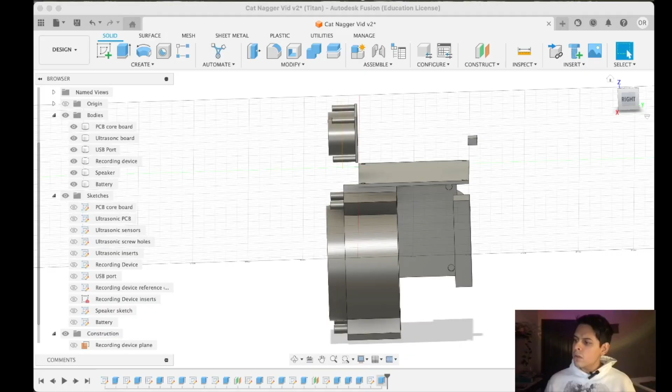So it is time to start our case. All what we did was to get the relevant references of my circuit and all its components to be able to create the case. So let's start the case.

Let's create a new construct. Let's create a plane right here. Let's give it 4 millimeters. It's fine, 4 millimeters is fine. So now we will create a sketch on this new construct.

We'll call it case top plane. So here we need to create a rectangle.

So the device should have walls. My idea is that the device should be assembled into the case in two pieces, two walls together, like this. So this is gonna be one half of the case, and this is gonna be the other half, and it's gonna be assembled like this. Why? Because this is gonna allow us to play better around with the components. That's my theory, hopefully it works. Because if not, it's gonna be difficult to assemble the device.

And you know what, that makes me think. The thing that I just told you makes me think that the battery shouldn't be there. Because if I want the battery to be connected, I think it would be more convenient to have the battery in the bottom, so we have two parts, only two.

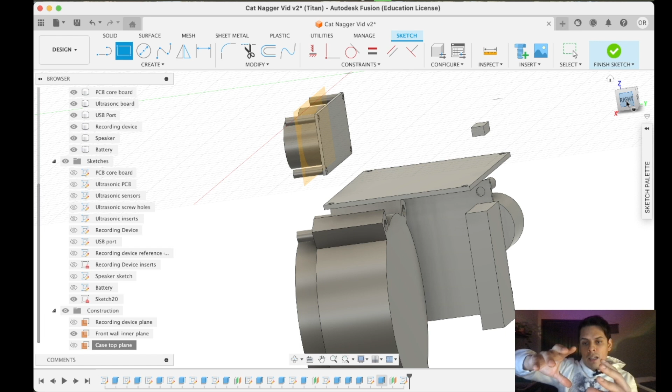So whenever you unassemble, you can just take, for example, the half that doesn't have any component on it. Because if you try to separate them, whenever you have the battery in a parallel wall, whenever you unassemble the device, you might pull the cable that connects to the battery. So I think it's gonna be better if we move the battery to the bottom.

What do you think? Let's move the battery to the bottom so we can actually see. I think it's gonna fit.

So what we can do with this sketch, so this is the top. Let's rename this sketch so we don't forget: top sketch.

Case top sketch. Okay, so let's go and copy the battery sketch. Actually, what we can do is just click copy, finish sketch. We can go back, go to the bottom, and create

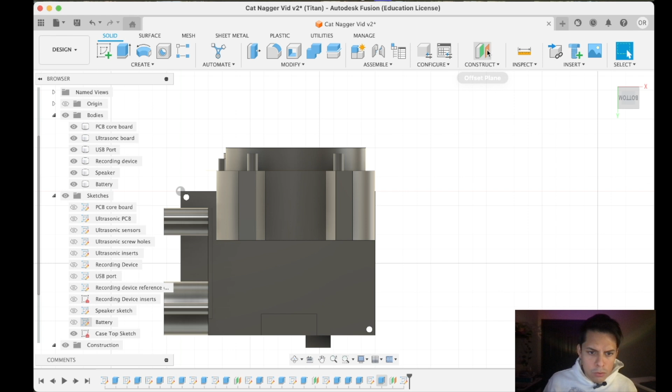a plane right here, so we can create another construct that will be a construct where we will use this. We need a plane, and what's going to be the distance? So we can go here and kind of move it and see, maybe 4, maybe 3 millimeters.

But it's going to be 7.4 millimeters, right, for the battery. Let's try to do the 23 millimeters. I think that's okay for that plane.

So we have plane 4, and on plane 4 we're going to create another sketch. Let's try, created the sketch.

So we are going to delete that, and we're going to paste this one. We're going to move it. Even it might actually fit under. Oh, we can rotate. Let's rotate it, and let's see where it fits.

Actually it fits perfectly here. Yeah, it fits perfectly here. So it's not going to collide with the speaker.

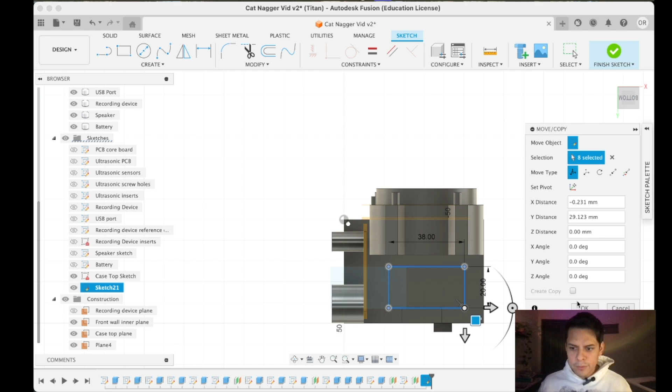Actually, we can extrude and go up. Yeah, it's perfect. Now we just need to extrude again, the battery. Finish sketch. Now we're gonna do minus 7.4 millimeters.

There you go. Now we can delete our previous battery. Let's delete this one. Now let's rename this one battery.

Now this plane is renamed battery plane, and this is gonna be also the case bottom plane. That's gonna be cool. Okay, we will be able to reuse this plane whenever we create.

Actually, we can start from the bottom, from this actual plane. Why? Because this side of this new volume that we're going to create is going to hold all the components, and the other one is just going to be the cover. So let's do it into two parts.

Okay, so now we will create another sketch on this plane. Yeah, there you go. Let's test that we're in the right plane. Sometimes one can get very confused. Okay, yeah.

We can revert that and start creating our case. So let's see how we're gonna do it. So from this, what is this? From here,

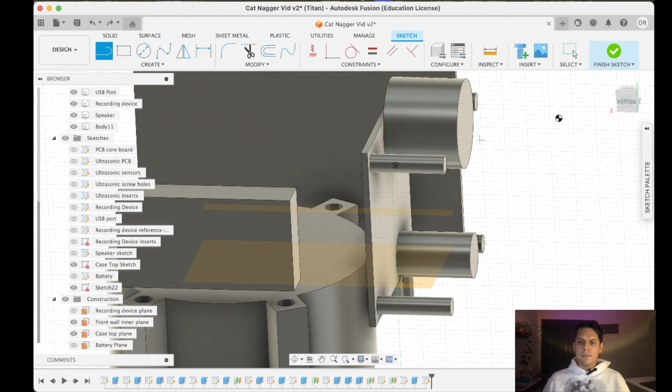so these are the references that need to be cut through. These shouldn't be at the same level. Why? Yeah, so these shouldn't be at the same level. Okay, I'm gonna let you know why later, but let's go and check this volume. This volume is part of the recording device.

This volume is part of the recording device.

So let's repeat this. Finish the sketch here. Let's edit this feature. This is 16 millimeters. Now let's do it 20 millimeters.

But you will see why, because I wanted to go through the wall, and actually the inserts should have a little more wall, a little more thickness behind, because you don't want the insert to just go all the way through. You want some wall behind, behind the insert, at the end of the insert. You will see why. So now I think we are okay.

So now we're gonna create it. We're gonna go back to my sketch here. I think it was this. So we're gonna rename it as

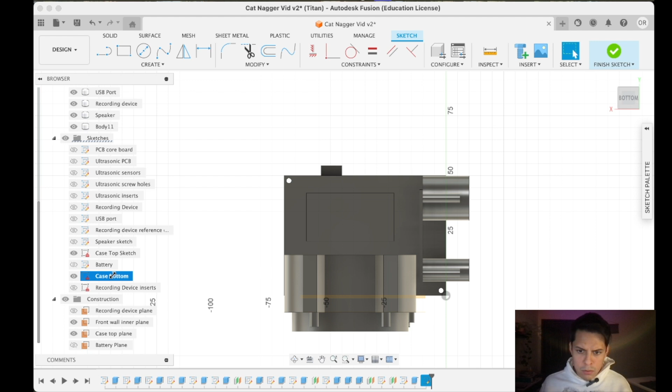Case bottom. So now we're gonna create a line. We're gonna transfer this line. So from here, I want maybe 2 more millimeters of wall.

Yeah, I think the best thickness for a wall should be 4 millimeters, maybe. For the device, maybe 3 millimeters. 3 millimeters is fine for a wall, I think. Now let's do it 4. Why not 4? Let's not be cheap with the plastic.

Okay, so what we're gonna do is, now we have the measurement from here. So now this one is gonna have 2 millimeters towards here. This one is gonna have 2 millimeters towards here. 2 millimeters. Okay, so what does this mean?

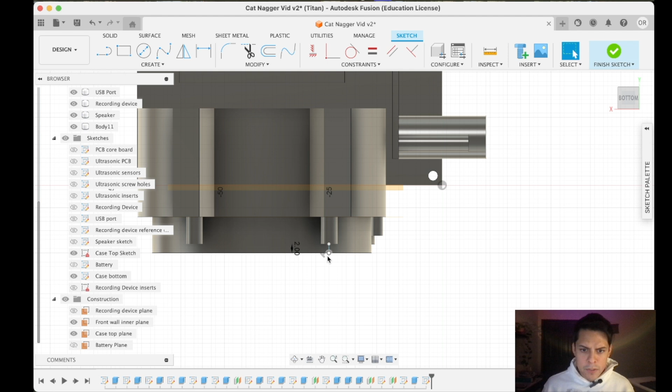This is gonna give me the reference of the outer wall for my device. So my outer wall should be here. The outer wall. Yes. So now from here,

I think it should be okay. Somewhere here. Right here. Oh no, let's repeat that. So I want this USB port to be a little outside. There you go. Yeah.

Okay, if we look at this, this will be the base. I think let's do this one here as well. Let's add to the speaker hole.

Why do I need the references for the holes to go so far? Because whenever I create the volume, there's an operation that is gonna respect those references, and it will go around those references instead of creating the volume.

So I will cut those spaces out of my actual volume, so I don't need to copy those references again and do the extrusion of the solid again. So I don't need to cut the solid. It's gonna do it for me automatically. That's the idea. That's why I'm so interested in the references going through the walls.

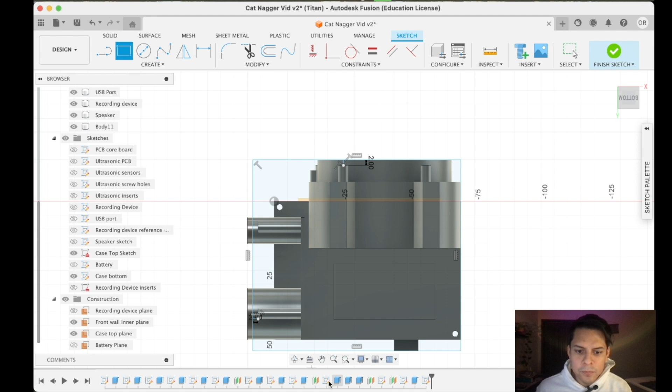Okay, so this is one. Okay, let's finish this sketch. Let's edit this one. Let's do 10. There you go. Now I have these.

Now I need the inner walls. So from this sketch, what I'm gonna do is also create the holders for the battery. So I'm gonna copy the references of that battery so I can create the battery holder.

So I want to try something. Let's see if I can. Let's see if it works. So from here, to the half. Let's see if my idea works.

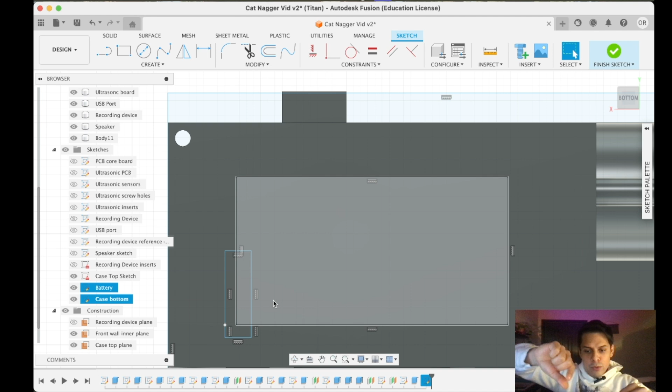I always wanted to have something like where you just introduce the battery and you snap it. So let's make something like this. Wait a second.

But let's give it some tolerance. Yeah, you don't want everything so close, so we are gonna give it some tolerance.

Then we will go here. This one. No, sorry, it's a little twisted. Then go to 0. There you go. So now we can delete this.

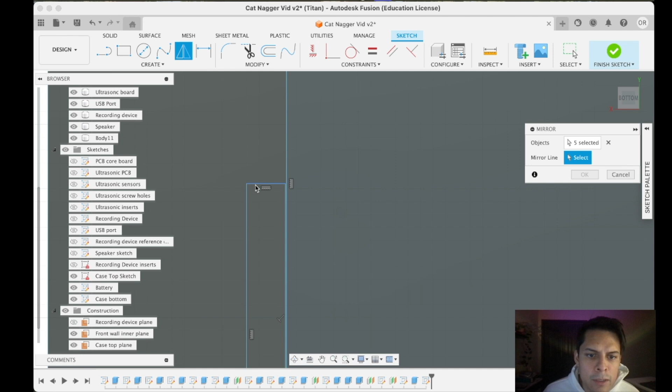We can delete this line. We can also delete this line. Now we can mirror these 1, 2, 3, 4, 5 lines. We can use mirror, select this one. We can trim this line, and there you go.

We have one piece of the holder, and then we are gonna have another holder here. No, let's do this. No, wait a second. No, what we can do is something like this here.

Now, from this one, we have something here, to here. Okay, like images. There you go. Yeah, actually, I want to move this line a little further. There you go. Okay, so now we can finish this sketch and we can extrude this.

So I'm going to extrude this thing. Extrude it somewhere here.

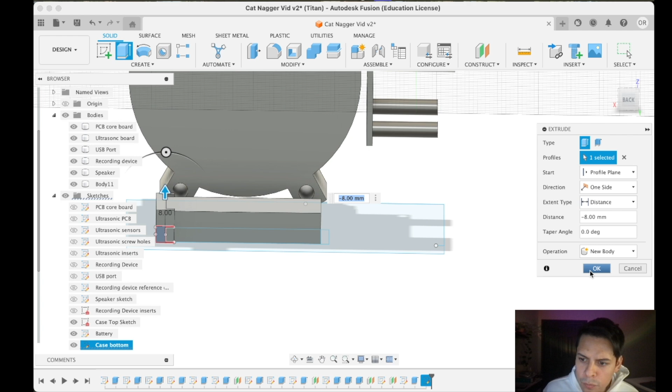Okay, now let's... so in this case, for example, I don't want to see this, and I want to see this, and this, and this. So I can focus only on this one.

So what I want to do now is create a small sketch here on this wall. And I want to see the battery as well. Battery, and these are the battery case bottom.

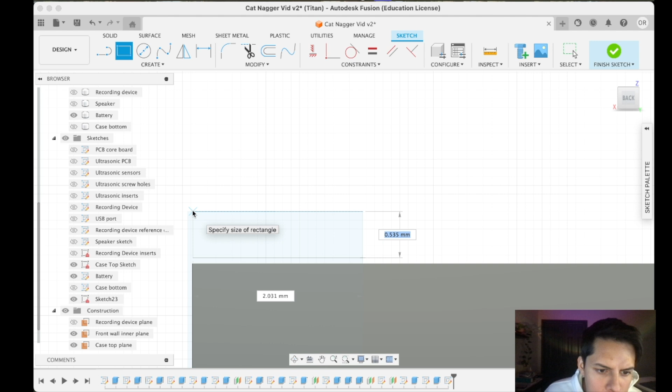So now here I'm working on this one. Also, I want to see battery, and maybe I want to see this. Well, I want to see actually the battery. Yeah, so what I want to get is somewhere here, because now I want to extrude this.

There you go. Now I want to see this, and then I want to extrude this. So this is going to be my battery holder. So hopefully with this, the battery doesn't move. I know the risk here—my experience tells me the 3D printer is not going to shift this. That's what I think.

Let's see, because I think this didn't work as I expected. So cancel, I need to modify my sketch actually.

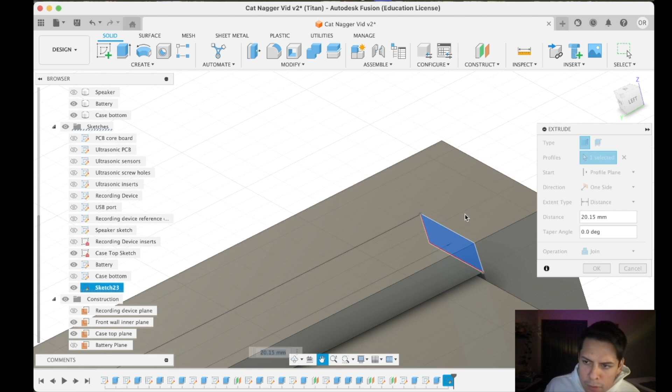Now we extrude here. Join. So I think I still need to change this. Join. There you go, there you go.

There's my battery holder. Now I need to see the case bottom, because I'm going to extrude this back part too, but I need to see the case bottom. So I'm going to extrude. I'm not being very exact with this because I don't think I need to. There you go.

Now here we're going to do something very fun. So here we're going to do it a little more like this. And in order to print this easier, we're going to do something a little crazy. We're going to create a sketch on this side, and create a triangle like this. A little triangle like this.

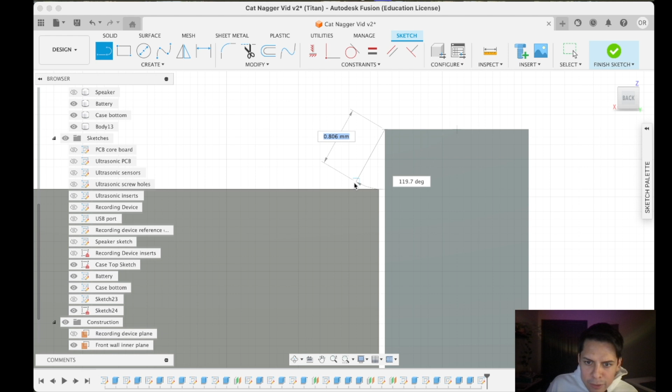So this should keep the battery in place. Also, what we are going to do is extrude this and leave the corners to object. There you go. Join.

Also, I'm going to change this sketch a little bit because I want to leave the corners without covering. Because if you look at the battery, one corner has the cable. So I want the flexibility to flip the battery as needed.

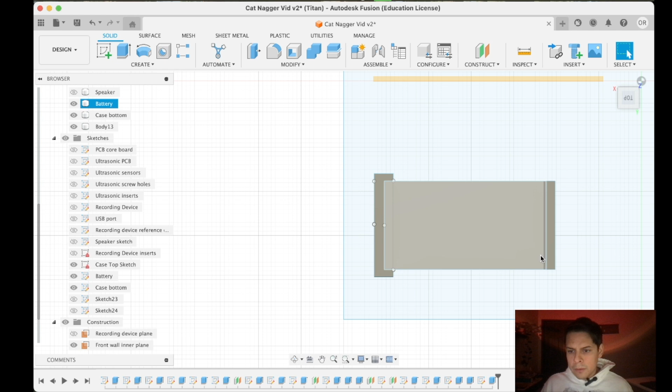So we can... I want to move it. I want to delete this constraint. Now I can do it. There you go, we don't need to be very precise for that. And I think we got this. Let's see. Okay, yeah.

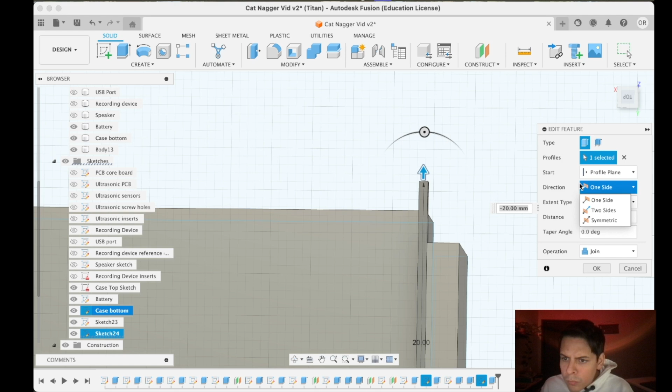Now, the only thing we need to do is repeat this volume edit feature. There you go, to object. So we select this face and it's going to extrude up to this face and join.

And now we have our battery holder. Also, we're going to do something to be able to print this correctly. We're going to modify this sketch. Let's see how we can modify this sketch.

Well, this sketch we're going to rename as battery bottom tip. And this we're going to rename as battery top holder ceiling. Okay, now we're going to change this sketch.

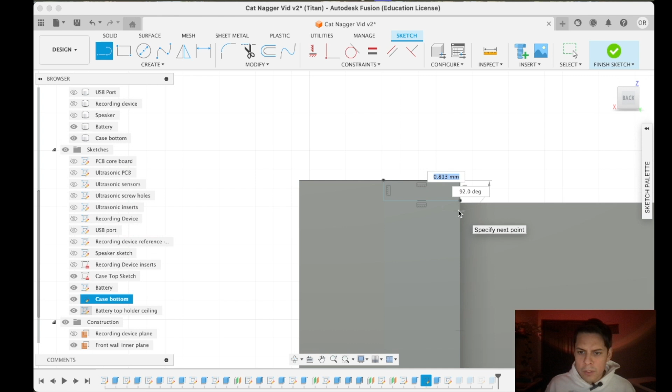So what I want for this sketch is to also have this kind of thing. So I want to have... no, this is not bad. Okay, this is too small. So we will need to repeat this. Finish sketch. We will need to repeat the extrusion of this feature. Let's do 10.

Yeah, I think this is gonna be better. We do this, let's say 9 millimeters. It's okay. Now we're gonna call this volume battery holder bottom.

This we are gonna combine these ones. With this, we can combine two components. Well, we will be able to do that until we create a case, but it's fine.

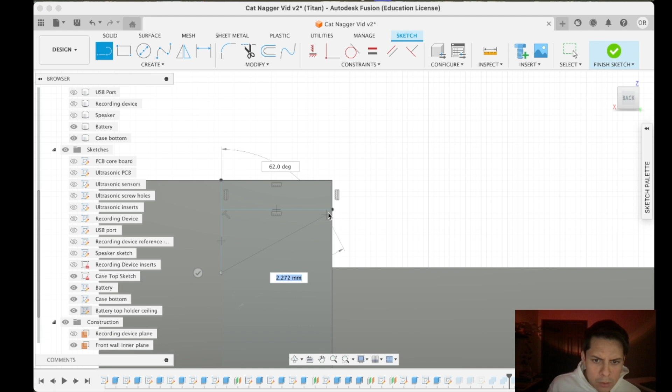Now we are gonna modify this sketch. This sketch we are gonna change it to something like this. So why? You will see.

Now there's an angle where it's gonna be easier for the printer, easier for the printer to print this ceiling. Without this, the printer would try to print on nothing, and it's gonna be messy. So it's better—most of the time it's better to keep angles on the overhangs.

So over here. Oh, there you go. We didn't lose it. Okay, so I think this was one of the most complicated parts, the battery holder, but we got it. Now, we can extrude the walls.

Now it's the moment to extrude the walls. Let's see if what I was thinking works for the references.

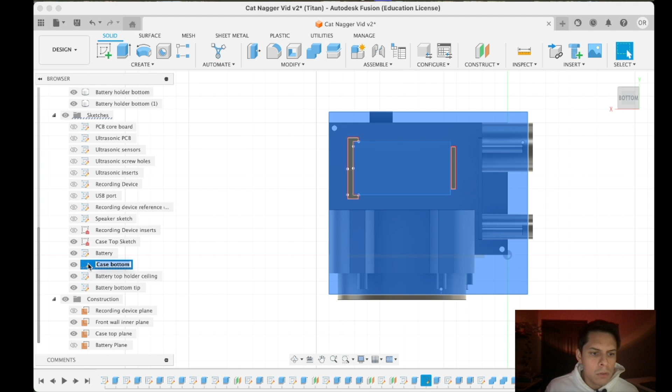This is gonna be these walls. We are gonna modify this. This is the case, we'll modify this sketch, and we are gonna use the offset. We said that we want 3 millimeter walls.

No, let's do more. 5 millimeter walls, like that more. I like that way more. Okay. Oh, that's 4 millimeters, I like that.

Okay, now we're gonna extrude the walls. Oh well, but this is gonna be only 2 walls. Yeah, this is gonna be only 2 walls. Why?

Because sketch. Because we only want 2 walls. But actually, yeah, this is fine. Okay, yeah, and up to here.

Yeah, these are gonna be our walls, and we're gonna eliminate this line, this line, this line, and this line. I think so, yeah, that should be done.

Sorry, we shouldn't eliminate a couple of walls. Sorry, there you go, we should keep. We should eliminate this one, and we should eliminate this one, this one.

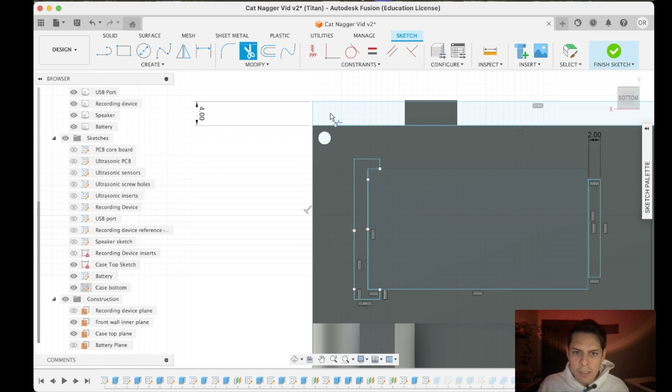Where does this line get up to? Oh, here's the line, yeah. Okay, so up to this here. Okay, yeah, I didn't have that line, so we can eliminate these, and we can stay with this.

So as I told you, we are gonna create 2 walls on each part of the case. The case is gonna have 2 parts, like a bottom part and a top part. So we are working on the bottom part, and the bottom part is gonna have 2 walls.

Now we are gonna try to create a solid. And there you go. No. New body. Okay, didn't work.

Actually, we're gonna need to cut it, but don't worry, I think I have an idea to do this. Don't worry. So I think that's gonna be okay.

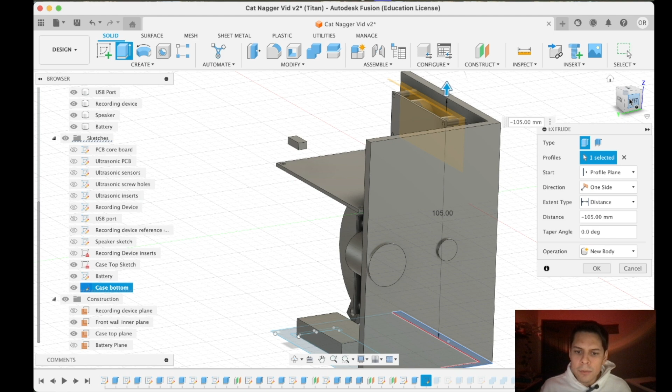Okay, yeah, let's say 105 millimeters. Yeah, that's fine. Okay, now we are gonna do the bottom.

Sketch, we're gonna remove this line. Now we are gonna create a solid towards, what you're gonna include it, you're gonna include it, you're gonna include it. And then now this one is gonna be 5 millimeters.

Oh, 8 millimeters, we don't need something so thick. Yeah. I think this is fine. Okay. Okay. Yeah, this side, okay.

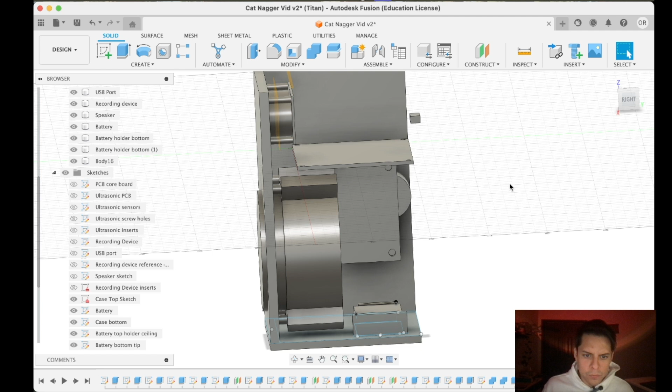So, for example, we're gonna cut. We can take this one, and to cut through these walls, we can edit feature and do a cut. Objects to cut.

Cancel? No. I'm pretty sure I can. Yeah, I can move this one here. Yeah, I can move it through the history. Edit feature and cut. There you go, and voila.

Now we just cut through our body. No, that was very nice. But let's keep moving with the inserts of our ultrasonic thing.

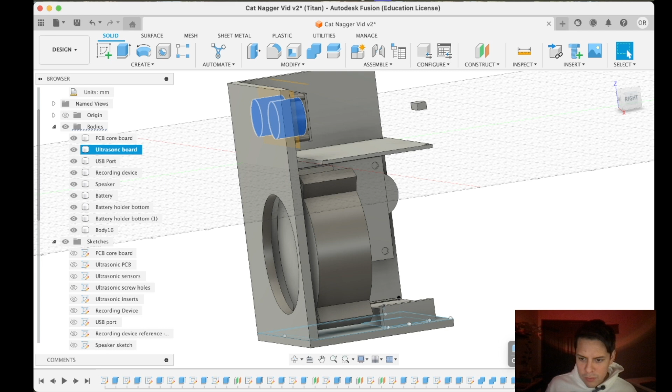Okay, we can do the same. Actually, we can edit this feature. We are gonna do it like this. We're gonna just increase the distance and cut through.

It says there, there's no object to cut. We select it, and there you go. Now we just cut through our wall. We can repeat this process with this.

Okay, if you look at this, when you select the volume, it indicates here with these 3 lines which one you have selected. So let's move towards the end. We can edit feature and we can select cut, objects to cut body, and there you go.

Now, as you can see, there's a space. There is still a space here. The thing is that we need to actually cut through the walls to have those.

So let's do it. We need also those ones to be almost here. Cancel. Let's move them almost to the end. Cancel, move it to the end. And these ones, this volume to the end.

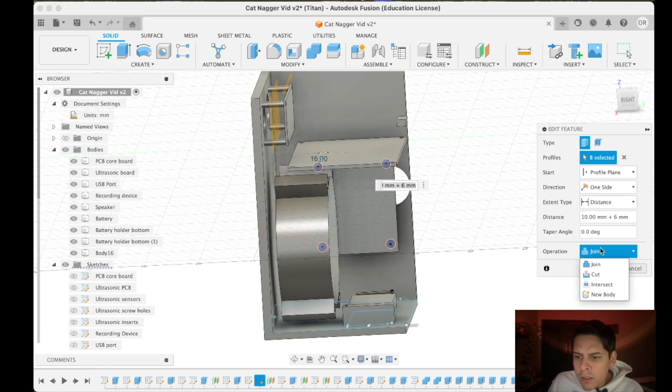Now, actually, let's join them now, because now we can join them. Let's join them, let's join all those geometries. Actually, it didn't join them.

So we select the target body, and then we select this one. I think this happened wrongly. Where's the battery? The battery. This.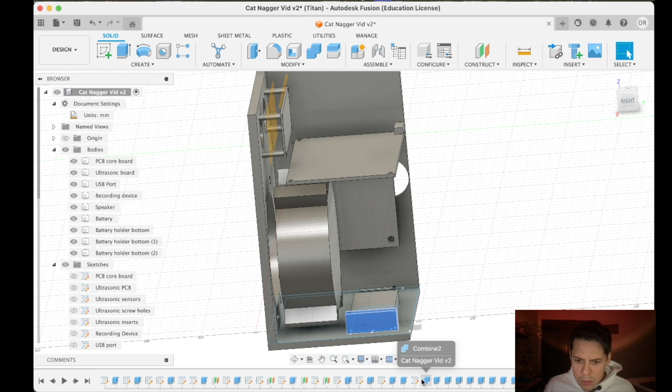So let's delete this one. Let's delete this one. Now the battery - how can we split the battery from the bottom?

So let's change that extrusion. Yeah, this extrusion edit feature, instead of join, new body. There you go. Now it is a new body. So you have the body 19. Still, oh yeah, there you go. So now use this one, this one, this one.

So now we're gonna join everything to this. Now this one, and this one. Now they are all joined in body 19. We're gonna rename it like case bottom. And there you go. Now we have almost everything except for this one. I'm gonna do this one and cut. Good, there you go.

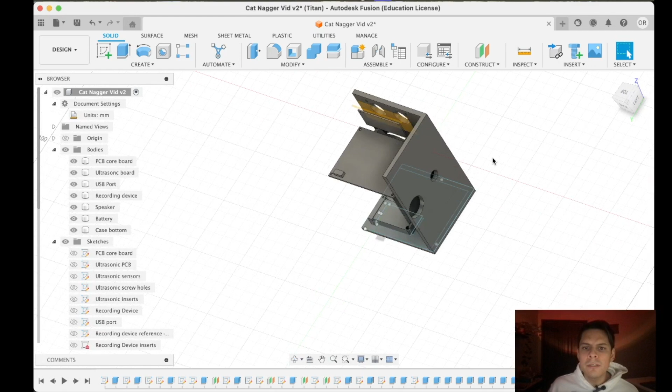Now I think we have everything that we need. No, there's something I don't like. I need these ones to go a little more, because if you look at this, there's too few. But what I was thinking, we will need to take a cylinder out.

This is gonna be very complicated because if I print like this, it's gonna be complicated because since it is a very small amount of material that needs to go out to cover the insert, it's gonna be complicated to print that because of the overhang.

So what we can do is extrude the material and try to fill it around and see if that can help, or maybe just do like what we did with the triangle previously. What we're gonna do is try to accommodate some material to hold the insert better.

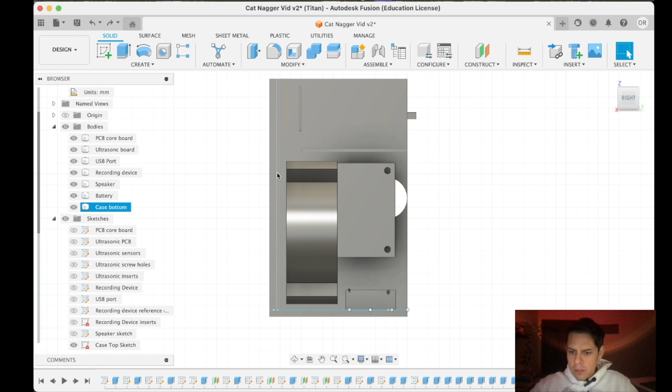To achieve that, we will need to do something very tricky, very sketchy. And it's going to pull up. Actually, when you see some cases for devices, the inserts, or where the screw goes, are pulled a little off from the inner face of the case to accommodate the screw. So we're gonna do the same.

But since it's gonna be complicated because of how the printer works - I'm gonna try to print it vertical like this - so yeah, it's gonna be a little tricky. I don't want to use too much support, and even with support it might make it complicated. So let's try to make these the holders for the insert.

So what we're gonna do is create a new sketch here on this face, and this is gonna be very, very simple. So we're gonna remove this. Maybe the recording device - no, actually, let's remove the speaker, the ultrasonic board, and let's leave this one.

So what we're gonna do is a square, but let's see how we can do a rectangle, a center rectangle. So we're gonna use a center rectangle for this. I think this circle is 2.8 millimeters, so it's gonna fit in a 2.8 by 2.8.

So the square should be something around, let's say, 4 millimeters maybe - let's play around with it. I think this is fine, 4 millimeters. So let's repeat that process - double enter 4 millimeters, 4 millimeters, 4 millimeters. For this, I guess it's gonna be bigger.

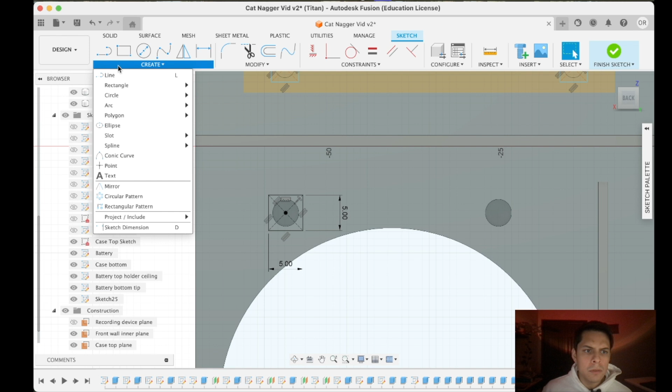Maybe 5 by 5. I like it, 5 by 5. Rectangle, 5 by 5. Rectangle, center rectangle, 5 by 5. Let's do the next one, 5 by 5. Okay, so we have it - like it. Now we'll create a solid from this.

But now I want to show the speaker. So let's - I want to show this. No, this - don't show any plane. Don't show anything. Let's not show the speaker yet. We will use the speaker, but in a moment. Oh yeah, there you go. Which is this? Which is this? Which is this?

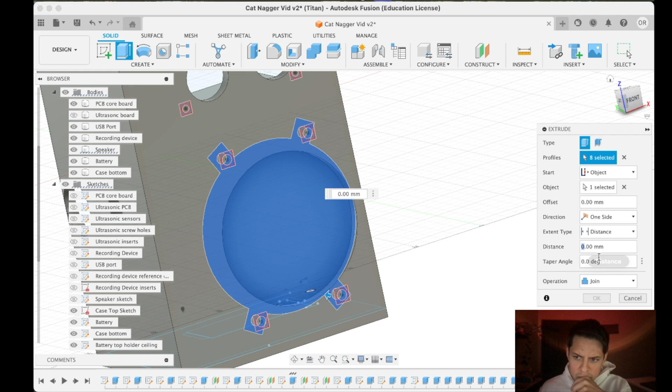Now we're gonna show the speaker, because what we're gonna do is extend to object. And what's gonna be the object? The speaker. So extend to this object - maybe join, yeah, it's gonna join. Object, direction, one side, selected. Extent type to object, start profile plane. Yeah, and I need to select the object. Let's confirm. Yes, I think that's exactly what I wanted.

Okay, I think that's exactly what I needed. But now the complicated part comes to play: how to do it without a critical overhang.

To avoid a critical overhang, I think we need to create a new sketch. Let's see what sketch these are, then edit. This is going to be the insert holders, the front wall insert holders.

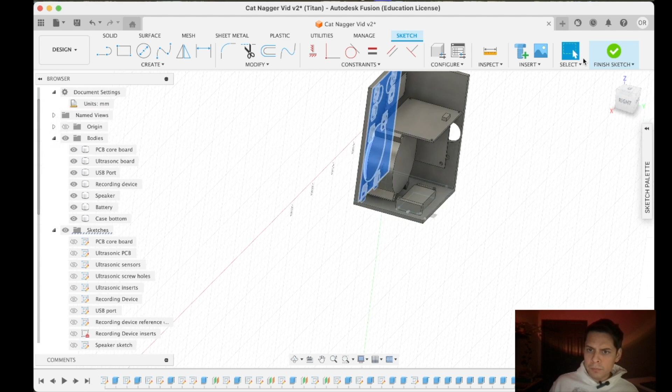Now we have this, we have that. Now we are going to figure out how to make it not critical. This is going to be kind of complicated because of this, but let's try it and see if we can do it.

So now we are going to create another plane, and do this as well using some other features. Now we're going to create a sketch here, and make simple, basic triangles.

I think 45 degrees will be okay. Yes, 45 degrees, I think it's a good one.

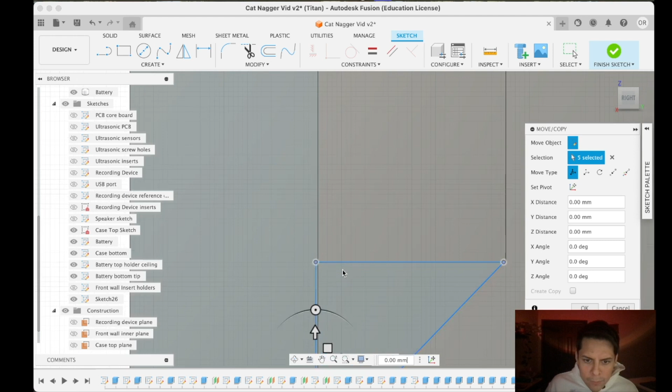So we're going to copy that triangle. There you go, and now we have a triangle - we have two triangles. We're going to create another triangle here.

Now we close the triangle, and there you go. This is our triangle, and we're going to copy this triangle.

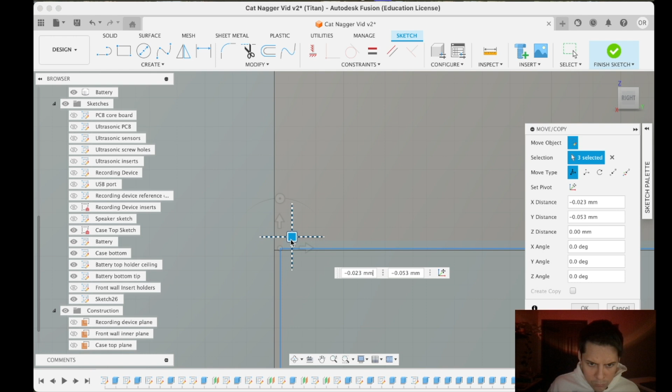I lost the audio here again due to my microphone, so the audio is going to be separated. Here we continue copying the triangle to all the extrusions for the inserts. Now we set the triangle in the corners of the insert volumes - we need to zoom in a bit to catch the corner because it's not transferring to the sketch.

So we finalized the sketch, and it seems that whenever we extruded the volumes for the inserts, since they ended up in the speaker, the speaker became the main volume, and everything connected got attached to the speaker - it joined the speaker volume. So here we are trying to separate the volume, going back in the timeline to redo the joining.

So we found the action, we are going to edit the operation, and create a new body instead when creating the volumes for the inserts. Once we separate it, we can join them to the correct volume, which in this case is the case bottom.

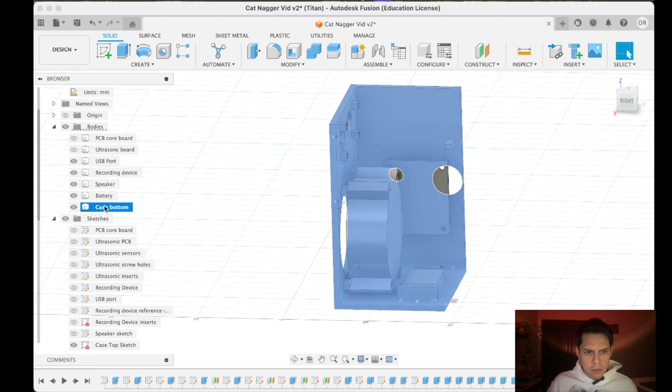Now you can see that we have the insert volumes joined to the case bottom. Now we are going to hide the unnecessary volumes - in this case the speaker and the board, the ultrasonic board and the circuit board.

Now we are going to extrude the triangles from the beginning face of the inserts to the end face of the inserts, the opposite face of the inserts.

Now, as you can see, the corner kind of got in the way of the circle of the ultrasonic sensor. So what we can do is include that volume in the ultrasonic sensor cut reference, but we're going to do that later, once we finish adding all the triangle volumes below all the insert volumes.

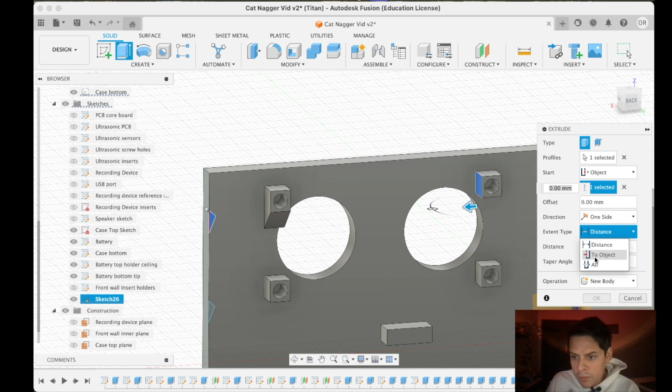Now we are going to go a little quicker, because we're just going to repeat the operation at all the insert volumes for all the triangles.

So now we want to apply the cut operation, the cut feature, to the extrusions of the inserts. We did this by moving the operation after the operation of extruding the triangles, moving it to the end. You won't see it very well because I have the video there, but I look for the cut operation in the timeline and move it all the way to the end.

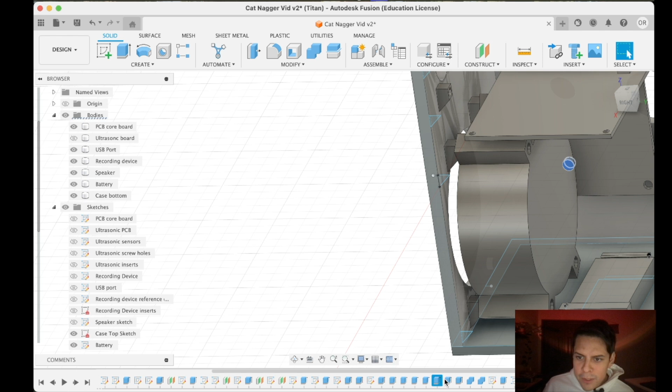And I'm going to do the same for the cut operation of the speaker. I go to the timeline and look for the cut operation based on the speaker reference that we created that crossed the volume. We move it to the end, passing the creation of the supports for the insert volumes, and as you can see, now it actually cut through them as well.

Now we are going to rename the triangles as the front wall overhangs - these are the overhang supports for the insert volumes, which will facilitate the printing of these extrusions for inserts.

Now it is time to add the volumes for the inserts in the side wall where the recording device is going to be. So let's create the rectangles from the center of the circles, 5 millimeters as before, and we'll repeat this for each circle.

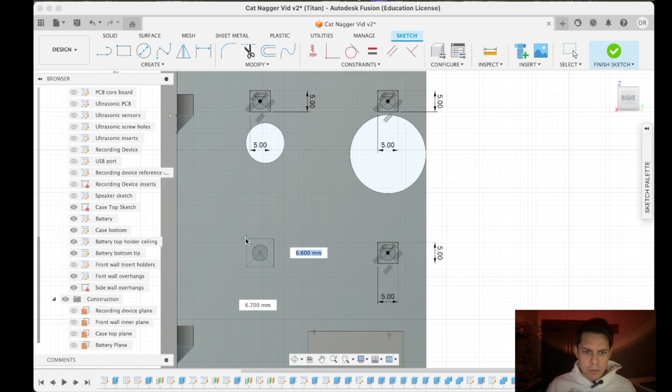Now we select the 4 volumes of the inserts to extrude them. We extrude them at 3 millimeters - well, no, we're going to go back and change that to 3.5 millimeters.

Now we are going to create the overhang. This process we have already done before: we snap the line operation to 45 degrees, and from the corner of the insert we pull the line to the wall. We close our rectangle and copy it to the bottom inserts, so we can extrude the overhang for the 4 inserts.

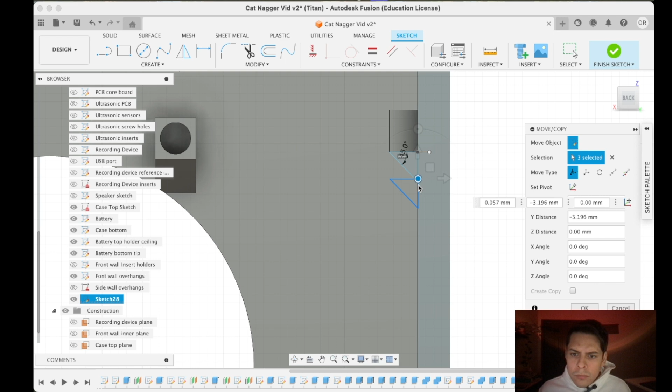It is time to extrude the overhangs. This operation is exactly the same as the ones for the front wall, so I'm going to speed this up a little bit.

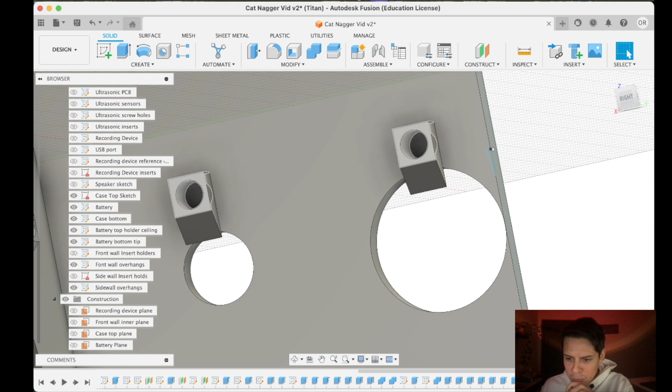Now we have the overhangs for these inserts, but we are having the same problem as before. We need to pull the cut operation to be after the creation of the overhang volumes, so we are going to pull it in the timeline all the way to the end, or at least after the creation of these overhang volumes.

Once this is arranged, we will be done with our first part of the case, and now we are ready to print. This is a time lapse of the printing in the Bambu Lab P1S.

I finished the print. It didn't look bad, but there are some improvements that I want to do. I want to add the inserts for the top part so I can screw it to the bottom part, as I show here. Also, the ultrasonic sensor didn't actually fit very well to the holes, so I need to add some 0.2 millimeters of tolerance in the distance between them and the size of the holes.

For the battery, it didn't fit as I would like to. It has this little plastic piece that didn't fit very well, but it's also just a matter of adjusting 2.3 millimeters. After printing, I compared and tried to fit the components into the case and noticed that they don't fit. But remember, there are no mistakes, only happy accidents.

No worries, this is all part of the process and gaining experience. Being experienced isn't about avoiding mistakes entirely, but about reducing the accumulation of flaws when designing. The best way to do this is by testing as soon as possible. My recommendation would be don't get too far ahead in your design without testing first.

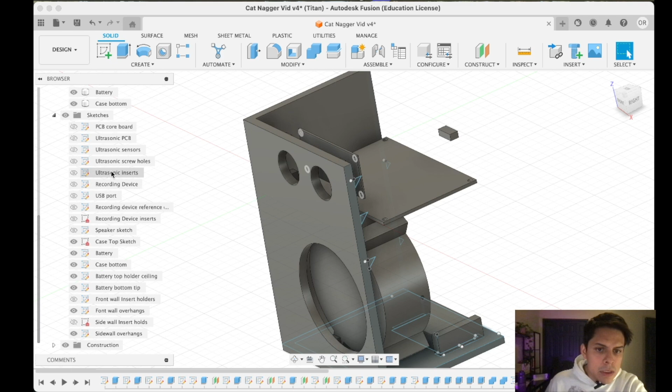So we can come back here. We want to now modify this sketch, so we can create a dimension to separate both sensors. That's one measurement that we need to fix. Instead of 25.3 millimeters, I want to do it 25.8.

What happened here? What happened is that this moved, but the only one that moved was the one on the right. So here we will start seeing problems because I didn't create constraints from the beginning. This is a very important thing to do in your design: always try to create as many measurement constraints as you can.

A way of doing it is as you saw here. I'm going to remove it and we'll go back. A way that we can achieve this without actually redoing all the work is by creating a line here. We will need to do this twice and then we can mirror it again. So what we can do is delete this and create...

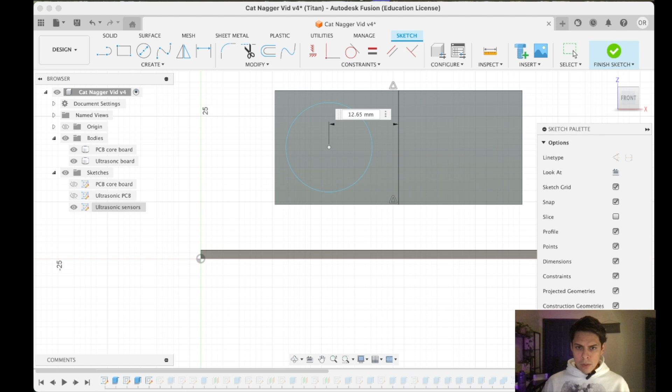I think with this we can create, how is it called, a sketch dimension. I call it measurement constraint, but I think it's a dimension. So let's increase this by 0.25. If you don't want to do the math, you can always let the software do it for you.

Now that we have this, we can also change the size of the circle right away. So here it's 15.7, but we need 0.5 more. So let's do it 16.2. Well, let's just do this. Oh well, but it needs to be 0.5 divided by 2. So let's try that.

There you go, perfect, so it did it for us. Now we will use this and this and this. And there you go, now we have constraints. We have our dimensions established, and they are going to be unmutable, so we cannot mutate them, we cannot change them.

Unless we go there at the end and delete them or change them. Yeah, I will keep that line, it doesn't affect the actual design. It's just usually what you see in the sketches doesn't translate to the volumes unless you actually create a volume from there by extruding.

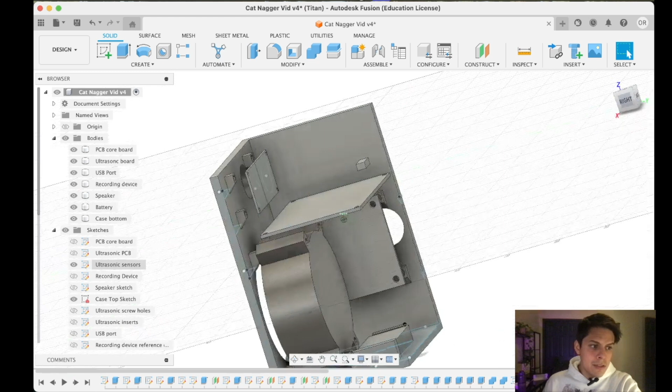So now that we have that measurement fixed, we will fix the insert holder. This task is going to take more time because we will need to fix many of them. We're going to hide the ultrasonic board, hide the sensors, and try to increase the size of this. So let's see if we can do it all at once.

So I think I don't want to go and search for the sketch. Is there a way that I can go and modify that sketch? Let me see. No, I don't think so. I mean, I think I don't. I think there might be, but...

Sketch, no. Let's go and try to modify it. Let's go and search because I didn't find a functionality that does that. I might research that later. This was the what? What do I find? These holes, oh, I think I know why.

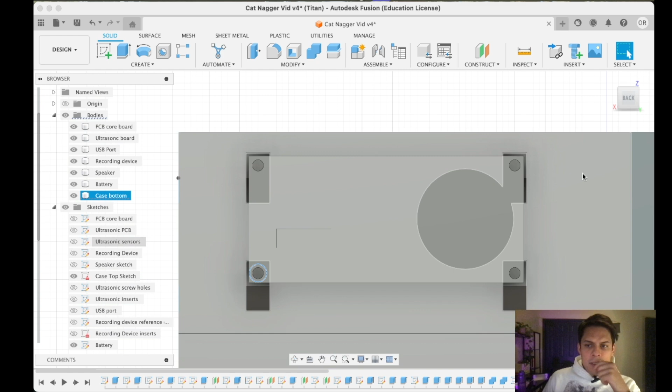They might exist on this volume. No, they don't exist there. We can look for that volume by going to our... there you go.

The holes, who made those holes? Front wall insert holders. Let me hide again the ultrasonic board. Yeah, it is this one, the front wall insert holders.

So now we are going to increase the size. We are going to set the sketch dimension. We have 2.8, so we will increase it to 3 millimeters. We'll finish the sketch so we can go to the ultrasonic insert and change this. There you go, so now we can actually change this. We're gonna have this be 3.

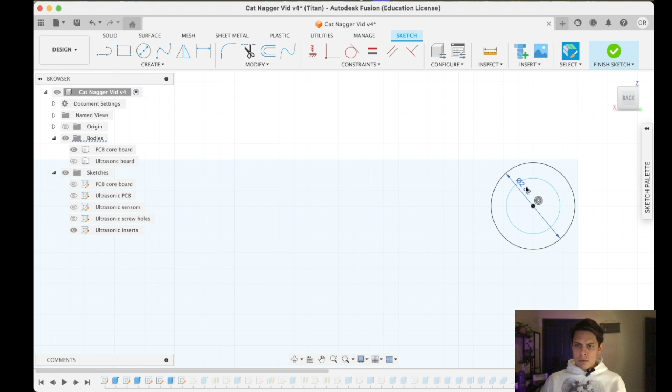Now we're gonna repeat that process to this, to this, to this. So sketch dimension is gonna be 3. Sketch dimension is gonna be 3. And the sketch dimension is gonna be 3. There you go, so now the diameter of the holes is 3 millimeters.

So we're gonna go and also modify these ones. This is the speaker. Let's see if it is this one. No, it's not this one. So we will need to find the inserts for the speaker. Let's see if it is this one. Okay, no. Let me find a way to actually go and change that, but we need to hide the speaker.

And we need to find in browser. Okay, yeah, so I found a way. Whenever you select something, it's gonna get selected in your timeline. So that timeline proved to be very useful again.

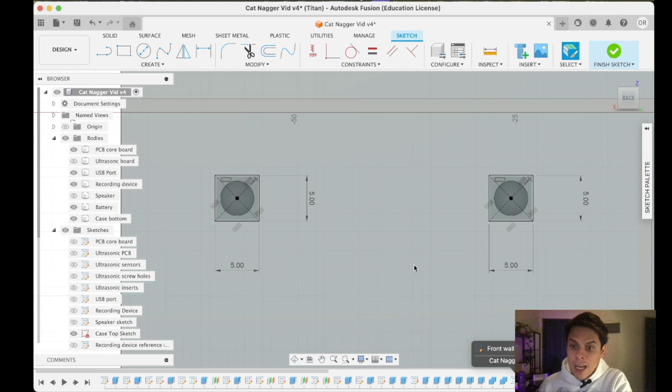Oh, I'm a little concerned. Is this at the same... is this aligned? Yeah, it is aligned, I am just making sure this is aligned. 90 degrees, yeah, it's aligned. Maybe because of the image here it's changing my perspective. Maybe this is deceiving my sight. Not sure, but it's fine.

So I select this and I change the constraint, change the dimension. Let's change it to... okay. Interesting, nice sketch.

Oh, okay, so these lived in the speaker actually. So sketch dimension... no, they don't live in the speaker. Okay, it's not that they don't live in the speaker, it's that they already have a constraint. That is the problem, okay.

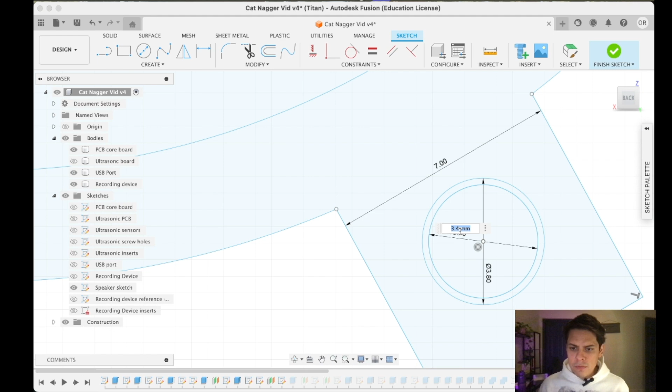Let's change the size of this. No, we want to change the external one, not the internal one. There you go. Alright, changed, click finish. So now our 3D model changed.

But now we want to change this square. Now we can go to the sketch here. I want to add 0.2 millimeters also to this. So 5.2, 5.2, 5.2, 5.2. Why do I want to add that?

0.2 to each side, it is because if I don't change that, the wall is gonna be very thin, and I don't want a thin wall holding the inserts, because whenever I heat up the inserts, the wall can get messed up. So we don't want that.

Okay, I think should I change also this wall? Let me see if I also need to add a dimension. 4.2, there you go. 4.2.

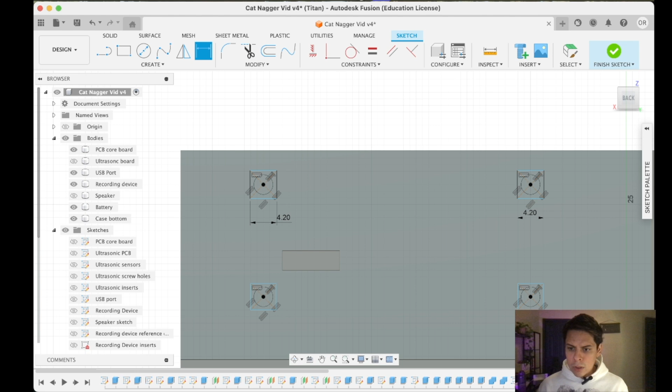4.2. There you go. So now we have the correct dimension. Let me make sure that this is a symmetrical square, so same constraint for the height and the length of the square.

Now we want to also fix the inserts right here. Maybe I'll just skip this part in the video because we've already seen how this is made. But in case I want to keep it in the video, I'm going to try to change this one. I don't see it in the timeline. Should be the sidewall insert holes. There you go, we'll change this one first. 4.2.

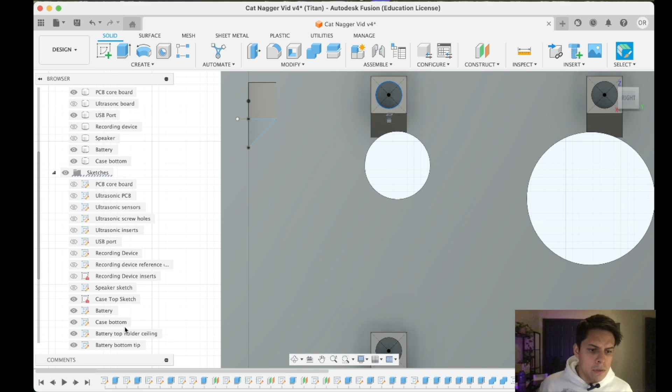5.2. 5.2. Okay, so now I'm going to also add a sketch dimension, but this dimension doesn't live in this sketch. So let's find out front wall - most likely this lives in the recording device. No, so where do these live? Recording device inserts, there you go. So this one already has a constraint, so 4, 4, 4.

Okay, and the battery, so the battery holder - we need to also change this thing. At the bottom, the sketch of this needs to go a little away from the battery. Why? It is fitting, but the battery is getting a little scratched. It has a thin plastic wrapping that is getting stuck into this little corner, so I need to move it a little further back. Let's try to move it away. So we need to change the sketch.

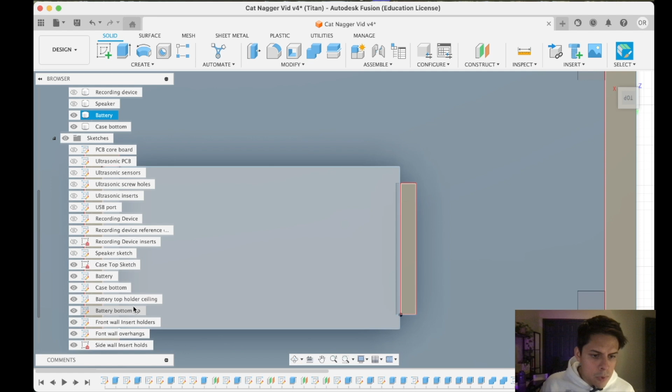So that sketch should be the case bottom, let's go and change that. Okay, why can't it's case bottom? Oh, is it top? Battery holder ceiling. Let's see, nope, that's not the thing. Maybe it's this one. Okay, that's a huge opportunity area - I need to improve the naming of my sketches.

Did you sketch? There you are, it was the case bottom. So now let me see how I can avoid that. Okay, I think I will need to select - how do I select this? Yeah, no, I need to move it. See if I can select. Why is it not letting me select? What does this mean?

Oh, this is the user interface change. So now you can - okay, no, you can select by... okay I select that, modify, move, can I move? No, well let's set the pivot, cancel, let's try to move it again, let's unselect this, and let's put it move and copy, there you go, there's it.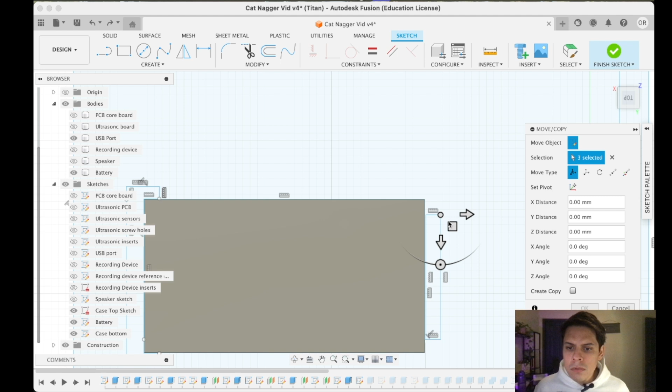1 millimeter is too much, so maybe I want to move it 0.5 millimeters, 0.5 millimeters - yeah, I think that should be enough. That will do, okay, so now we just fix our design.

Okay, so also the walls are a little too thin. Maybe not too thin, but if I want to use inserts to hold the case, that's going to be a problem because the walls are too thin to hold the inserts to hold the other part of the case. So I'm planning to use bolts with inserts to keep the two pieces together. It's not going to be very clean, but at least you'll see how to do those inserts in the wall.

I think it's going to be enough with only 2 of them. So what we're going to do is extrude some material from each corner of the case, and we are going to add an overhang of 45 degrees, the same as the other inserts, but we are going to create holes on the top. So the other part of the case goes on the top, it gets screwed to these inserts.

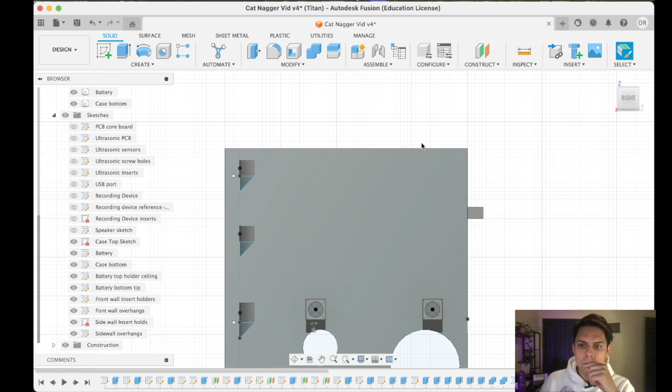So we can go and modify - how are we going to do it? I think the best option is going to be front, the right. Yeah, so the inserts are approximately 3 centimeters, 3.3 millimeters. The inserts need to be 0.6 centimeters deep, so we will need to have maybe 7 millimeters of material hanging.

So let's go and modify and create a new sketch on this wall. We are going to create a rectangle here - we say, no, it's one corner. I'm not getting the corner. Okay, yeah, I'm getting the corner now. So it is going to be 7 millimeters by 4.2. There you go, we have our rectangle.

Now we're going to extrude that, but we already have some material, so if we look at this, the line is 4 millimeters. So we said that it's going to be 4.2, so we want 0.2 - let's do 0.3 so we have enough space.

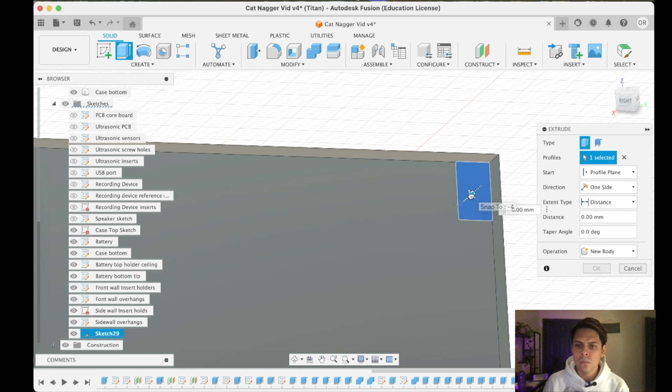0.4, I like even numbers. So this will add enough. Now the problem is that this will require some material in the overhang as well.

So we will create another sketch here, only for the purpose of having some overhang. Let's get 45 degrees overhang. And remember, don't press enter, what you need to press is tab. So it's 45, and we can move it. There you go. Now I think let's try to create a solid from there.

Yeah, we can create a solid actually from 2 different sketches, from the sketch line and the actual projection created by the volumes. You actually don't need to create a whole triangle. That's very nice, I didn't know about that feature.

So we will repeat from object to object. The object is this face, and we are gonna go to the next object that is gonna be the face on the other side of this volume. Well, we have the bug, but we already know how to fix it. So in the middle, yeah, there you go. I love that solution, I hate that bug. There you go, now we have our overhang.

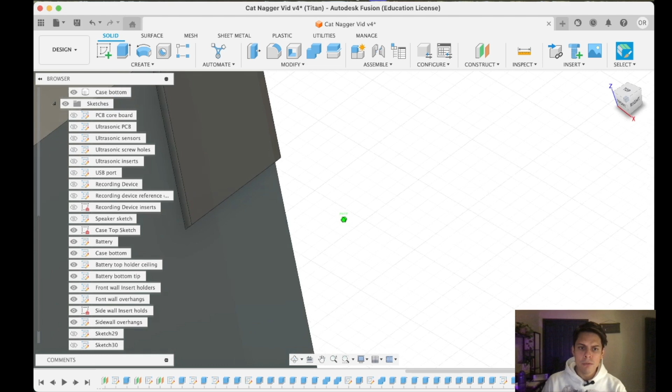We are almost ready to create our hole. We can go and create our hole here. How are we going to create a hole? So we need to create another sketch.

I think this is not what I wanted. Why? I think it was 3.8. Oh no, the diameter was actually 3 millimeters for that one. So we will repeat this one. We actually don't need to repeat it, we just need to change this to 3 millimeters. So now we have a considerable amount of material for the insert to expand the plastic whenever it heats up and enters the wall.

So now we are gonna create a solid. But this solid, I'm gonna wait because I want to have the same depth as the one that I'm gonna create here. So let's jump and create the sketch here in this wall. But before doing that, let's rename our sketches. Always rename our sketches. So this is the insert sidewall insert material.

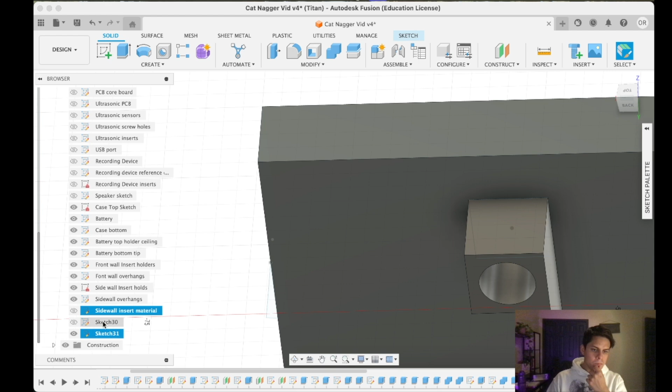Let's rename it as sidewall insert overhang. Then let's rename this one as sidewall insert hole. There you go.

So now we're gonna create a sketch here. Why cannot create a sketch? What? Create a sketch, what happened? I should be able to create a sketch. No, I'm in sketch. Okay, I didn't know what sketch I was on.

Now we will repeat the process. So we will open this to 7 and 4.2. Just 4.2, 4.2. Now we will take this one, 0.3, 0.4. We said 0.4. Yeah.

The feature, yeah, 0.4 millimeters. So it is the exact amount, the same exact amount.

Now we need to create this rectangle here. Okay, now we need here. We're gonna say 45 degrees. Nope, 45 degrees to this direction. So now we will want to match it with this line. Now we can create a solid.

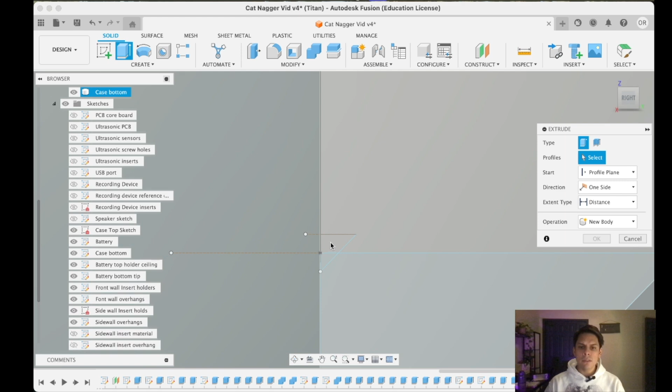That the same exact, what happened? Something is not good. Okay, first of all, what's this line? Oh wait, the thing is that here we need to hide this one. And where's this line from? Okay, doesn't matter, it disappeared. Now we have here, here, what's this? 1, 2, and 3, and we can create a solid.

Oh well, this time we weren't that fortunate, we will need to create the triangle ourselves. Why? I don't know, I don't want to figure it out. That's a very small detail that I don't think is gonna affect anything. I hope. Here you go. Now to the other side. And to this side, excellent.

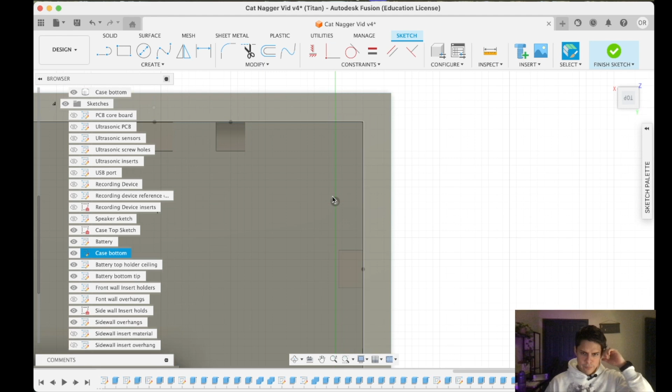We have our overhang, now we are ready to drill our hole. Now this is behaving in a very strange ways. Doesn't matter, we got this. We're gonna proceed with finding the corner, and from the corner we're gonna draw a line right there. No, we're gonna do it the other way around.

4.2, it should be somewhere around 2.1. So now we are gonna make this 3.8 circle. Wait, what was the measurement? Let me go back and remember. It was a 3 millimeter diameter for this. There you go.

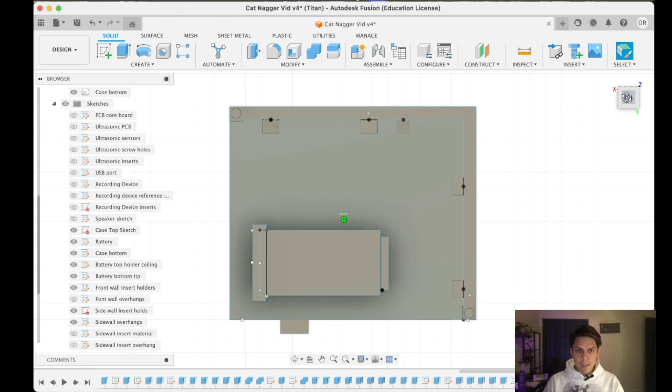Now we remove the supporting lines and drill the hole. But we said we were gonna do 2 of them. Now we can do a 6 millimeter hole, and I need to repeat the process because I did it wrong. It was minus 6 millimeters. What happened was that instead of cutting, it joined.

Now we have our holes, and I think we are ready to jump into the other part of the case. But before that, I'm gonna print this and validate my measurements again. But wait a second, something happened.

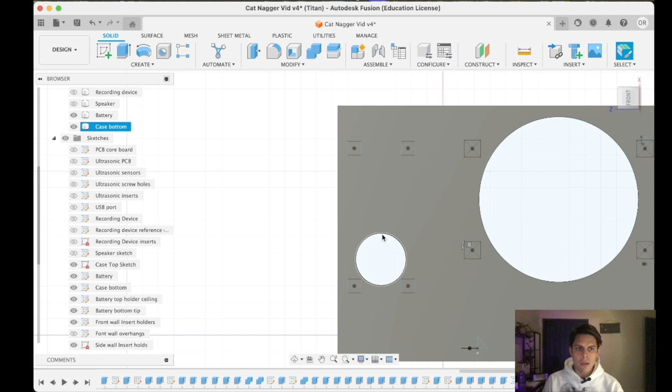We lost an eye. What happened? Since we eliminated the circle, we didn't assign the new circle to the extrusion, so we need to do it again. Don't worry, that's a very simple and quick fix. We just need to go to this feature and select this circle. There you go, now we have our 2 eyes back.

We have the holes for the connection with the other part of the case. We have moved our battery holder, and we have increased the size of the ultrasonic sensors and the size of the holes for the inserts. So hopefully this is gonna work fine. I'm gonna print it again and see if this fixes the problems.

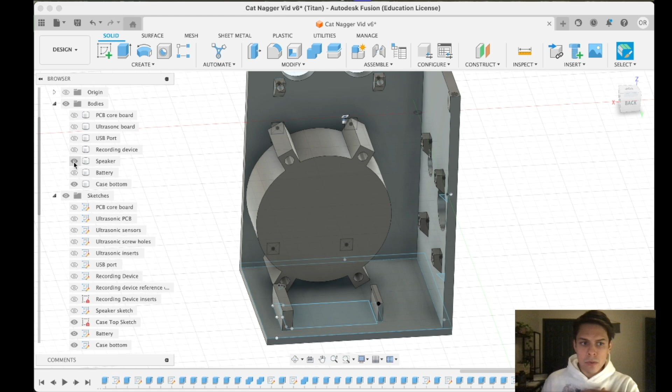Okay, so I'm gonna show you how to import your file and print it. I'm using a Bambu Labs printer with their slicer. The process to export is into an STL file. But my design has these floating components, and I don't want to print those.

What I only want to print in this file -- and it's better if you keep your parts separated in different files -- is the case bottom. So I hide everything except the case bottom. The sketches don't matter. Then I click on export. I have Cat Nagger v6, that's okay, I export it, and then I open Bambu Labs and create a new project.

This is fine, no I don't want to just modify these current modify values, I want to start from scratch. So now I pull my file that I store in my files, and there you go, I pull the STL file. You need to make sure you select the STL, save it as STL, and import it to the right file. In my case it didn't save, as you saw.

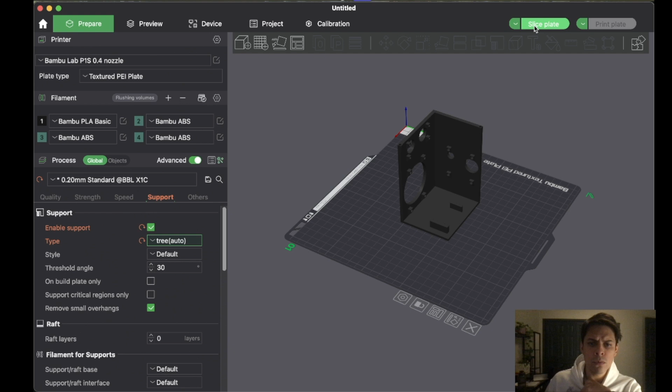I discarded the change, but the only change I make is putting in PLA -- it's Elson, something like that, the name of the filament I use. So the settings are pretty standard PLA, and I'm gonna use type tree auto, style default, threshold angle of 30 degrees, and support critical regions only. No, I want support on everything. Remove small overhangs -- I don't know if I want to do this here because I have the little overhangs in my screws and my inserts right here.

So I'm gonna proceed and slice the plate. And I got these beautiful trees everywhere, and I think it's fine. I could even support here. I will increase the angle to 35. Let's see what happens. Usually I don't use 35 degrees, but I'm curious about the little holes -- why it's getting me the little holes. That didn't happen before, and I don't think they are needed.

Let's tweak these a little and see if I can get rid of the supporting holes. Okay, yeah, by removing the small overhangs, I think it doesn't remove the ones here. I think it validates my little overhangs -- yep, they're intact, untouched.

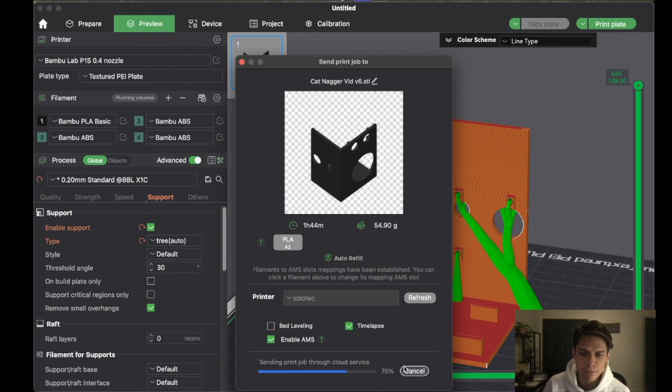Hopefully this prints well, so good luck to my design, good luck to my print. So let's print the plate. Blah blah blah, I only press OK to everything, I don't need bed leveling, it's leveled pretty sure. And it started to print. So I'll be back with the results later.

The print is complete, and now I remove the supports. They come off pretty easily.

In the next video, I will show you how to place the components, heat them up, and insert the inserts into the bottom case. Thanks for watching.